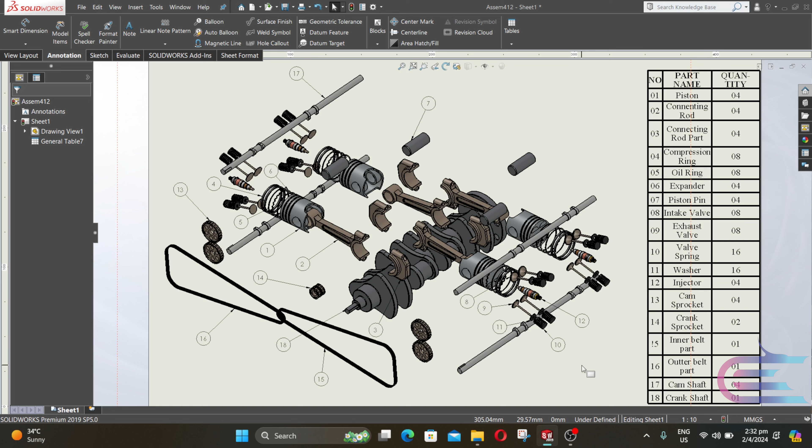In this tutorial, we are going to assemble the power transmission components of the boxer 4 engine. First, we'll assemble the sprocket chain mechanism, then use an alternative method: belt and pulley. Remember, if your PC is not powerful, it may slow down during chain sprocket assembly and cause problems during motion study. To avoid this, I recommend using the belt pulley method shown after the chain sprocket assembly.

Click on Insert Component, then go to Sprocket Chain, press Ctrl and select Cam Sprocket and Crank Sprocket. Now place it here.

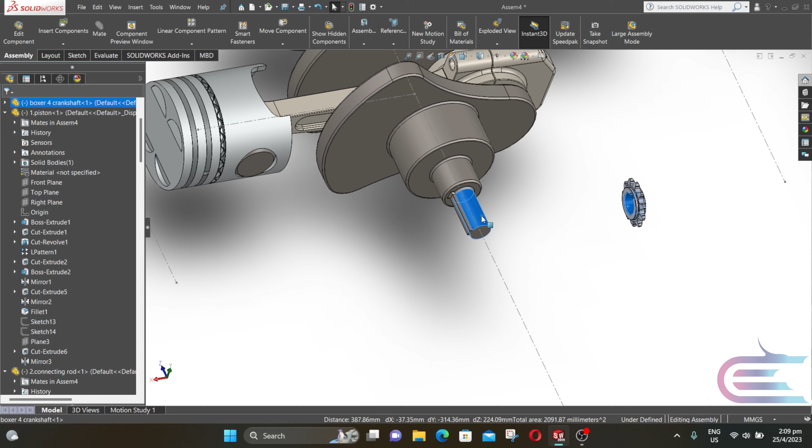Now press Ctrl and select these two surfaces, then click on Mate, select Concentric and click OK. Now select these two key slot surfaces, select Coincident and click OK.

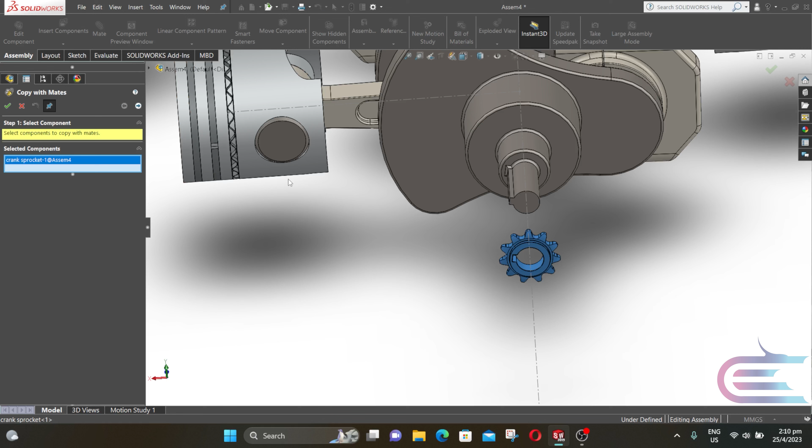Now close the mate, expand Insert Component and select Copy with Mate, then select the crank sprocket, then click on Next. Now follow the violet color and select these surfaces, then click OK.

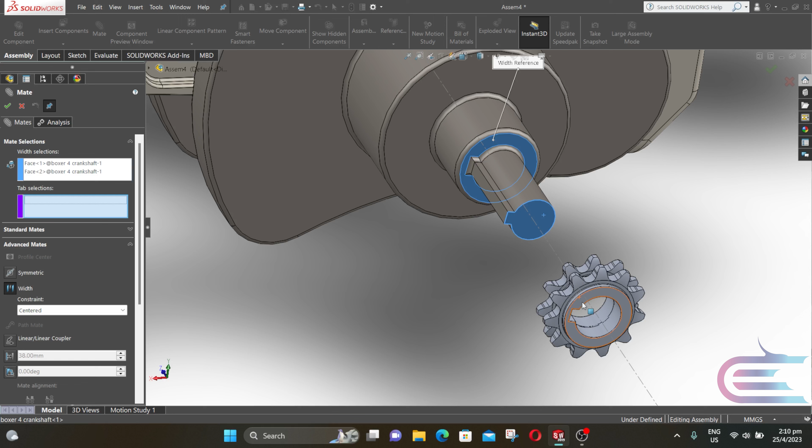Now click on Mate, expand Advanced Mate and select Width, and select these two surfaces and select both sides of the sprocket. Then click OK.

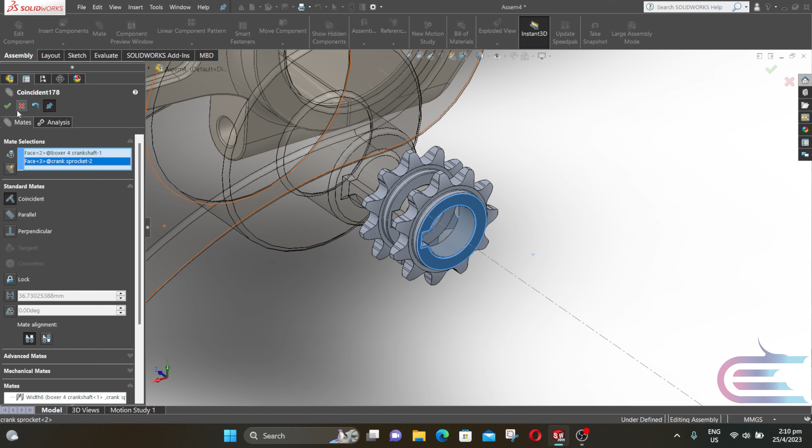Now again select this surface and this surface. Go to Standard Mate and select Coincident, then click OK. Now close the mate.

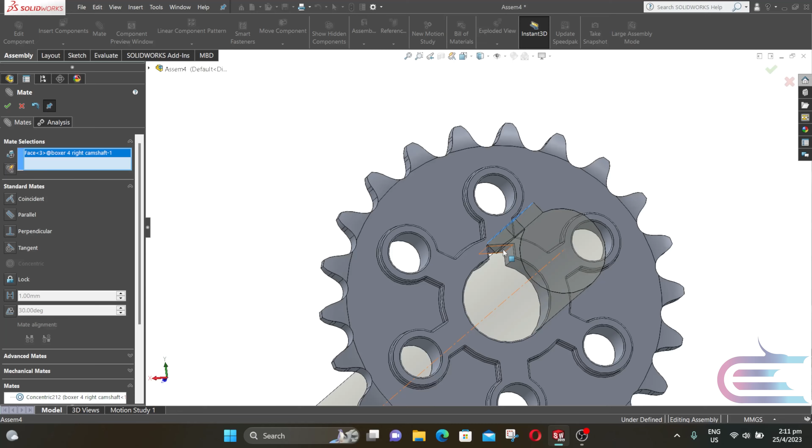Now press Ctrl, select these two surfaces, then click on Mate, select Concentric and click OK. Now select the key slot surfaces, select Coincident and click OK.

Now close the mate, expand Insert Component and select Copy with Mates. Then select the cam sprocket and click on Next. Now follow the violet color and choose the proper surfaces.

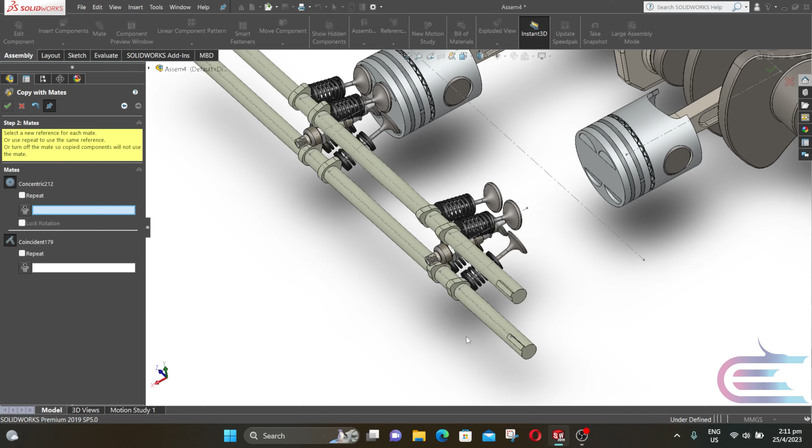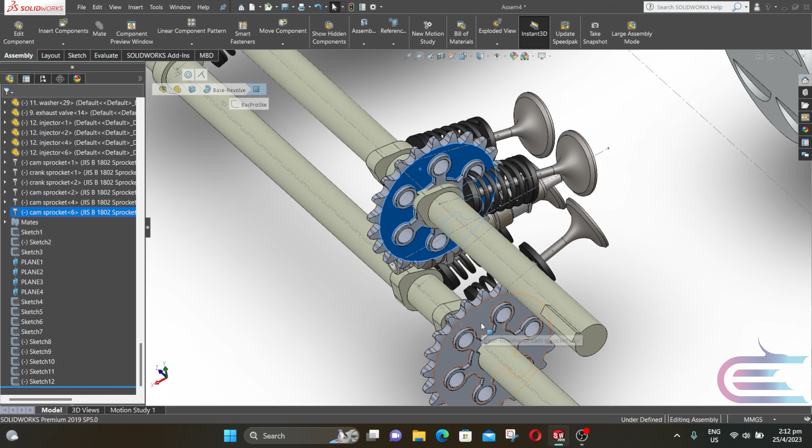Close mate. Select this surface, press Ctrl and select this surface. Then click on Mate, select Coincident and click OK.

Similarly, repeat the same process for these two cam sprockets.

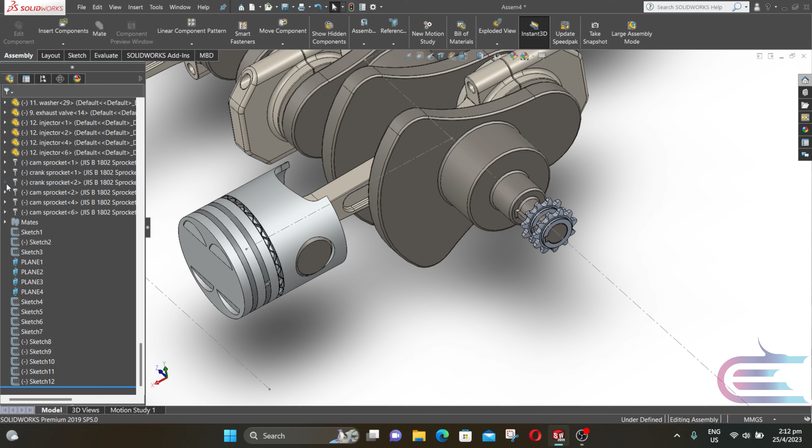Now select the outer crank sprocket and expand it. Select the midplane of the crank sprocket. Press Ctrl. Now expand any of these two cam sprockets and select the midplane of that. Then click on Mate, select Coincident, then click OK.

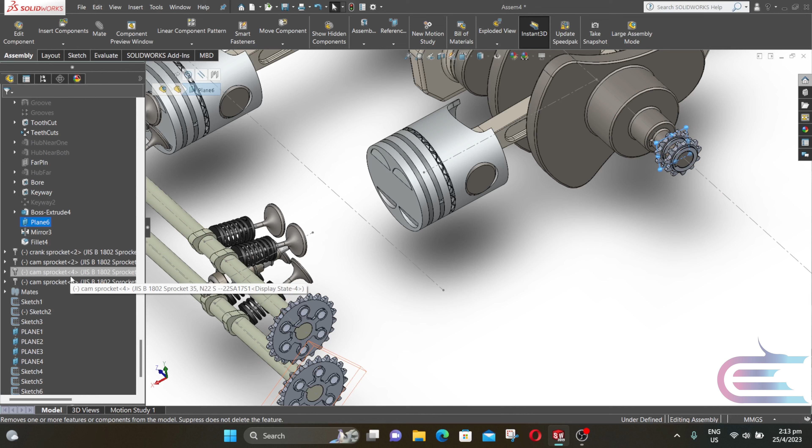Now repeat the same process for the other crank sprocket and the rest of the two cam sprockets. If you put the cursor over any of these sprockets, an orange color outline will help you identify the proper one.

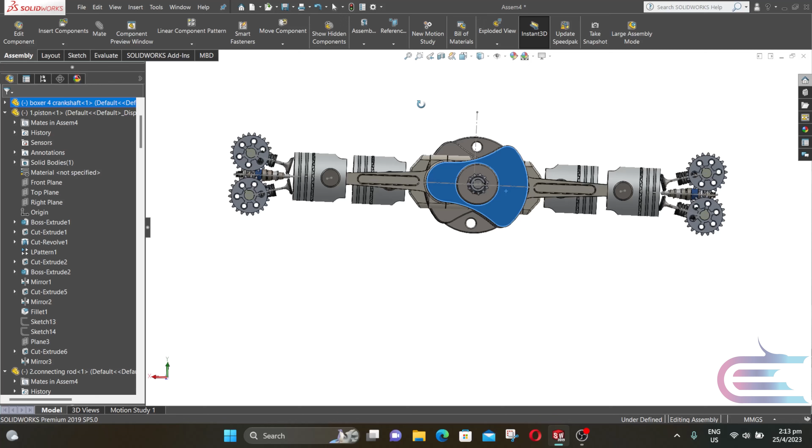Now we have to synchronize the engine components. Place the first piston at top dead center, as it is the beginning of the intake stroke.

Now place the intake valve just before it is completely opened, and place the exhaust valve just before it is closed.

After the 180-degree intake stroke occurs at piston number 4, we are going to place the intake and exhaust valve 90 degrees backward to the intake position.

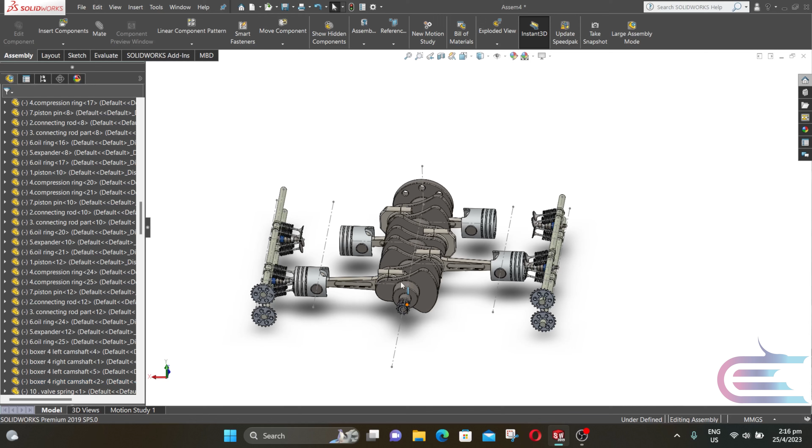Expand assembly and select belt chain. Now select the circles of the sprocket. Click on belt location plane, then expand assembly and select the midplane of the sprocket.

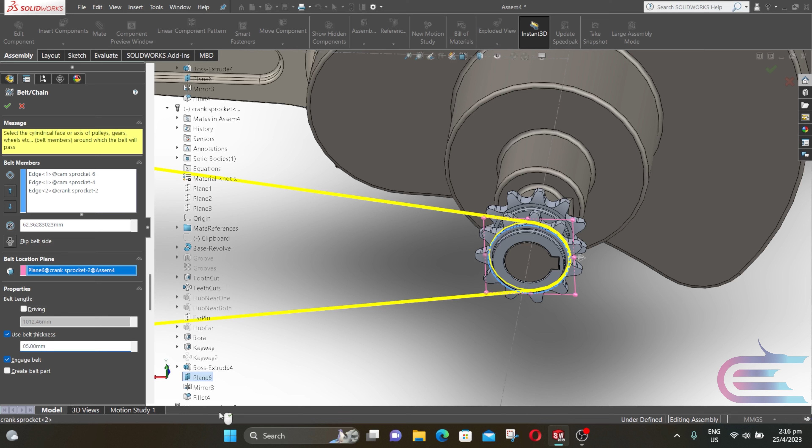Click on use belt thickness and the thickness is 5 mm. Now repeat the same process for making another chain path.

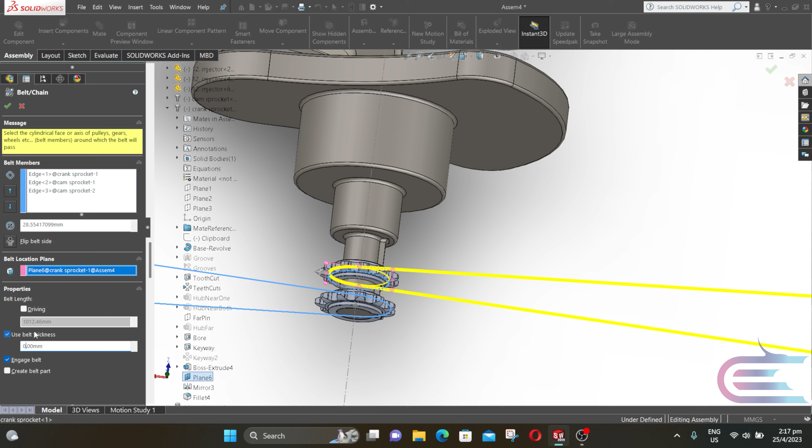Now click on insert component, select chain inner part and chain outer part, then click on open. Now expand linear component pattern and select chain component pattern.

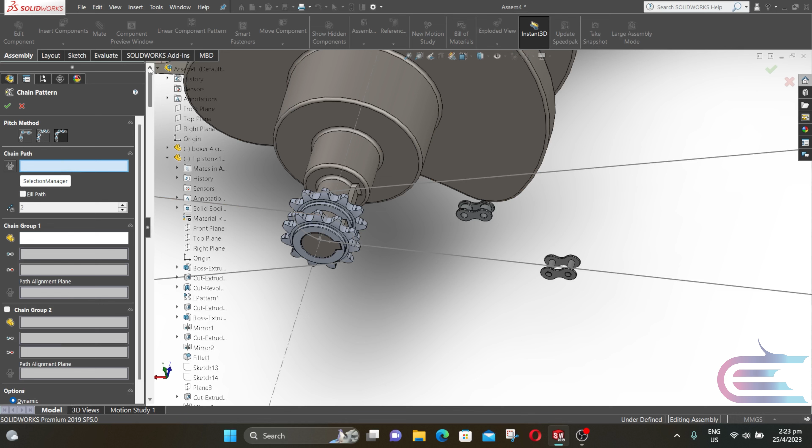Now select the third pitch method, expand assembly, go to bottom, expand belt and select the belt sketch. Click on fill path, select the inner chain part as chain group 1, then select these two holes.

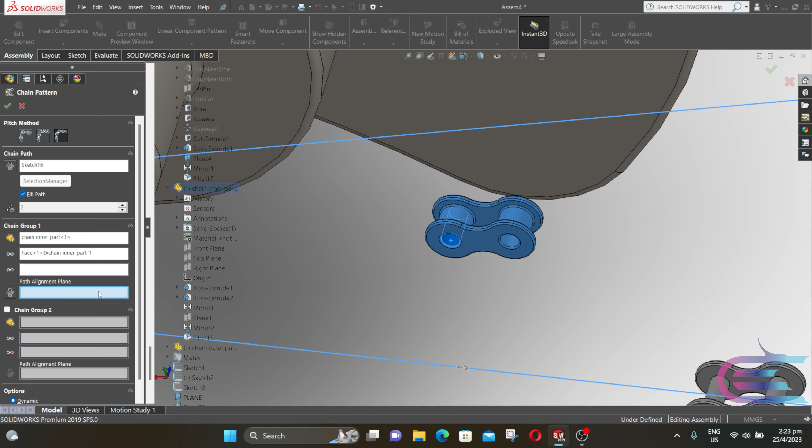Then it asks for the chain alignment path; select the midplane of the inner chain component, then click on chain group 2 and select the outer chain part.

Select these two circular surfaces, and then it asks for the chain alignment path, so select the midplane of that part. You can see a gap here, so increase by one more component.

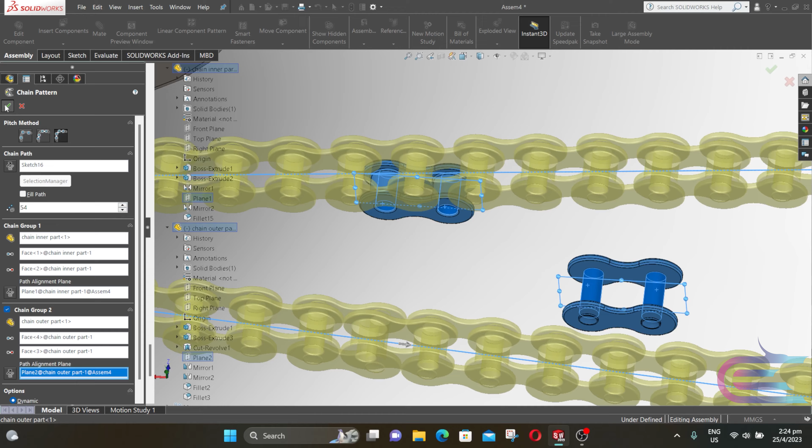Now repeat the same process for this side also.

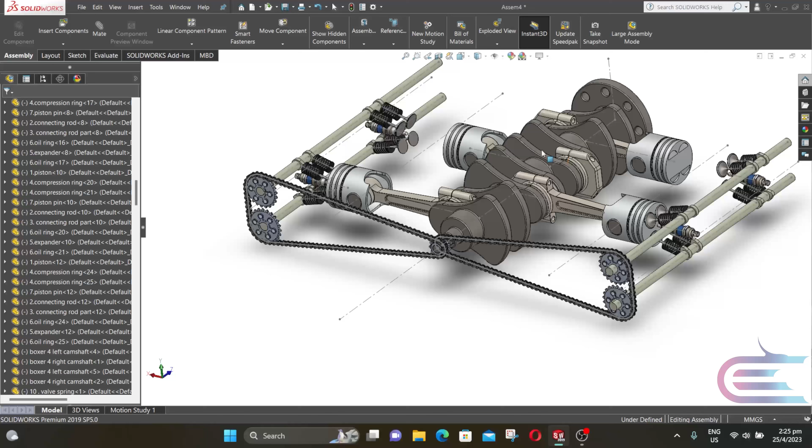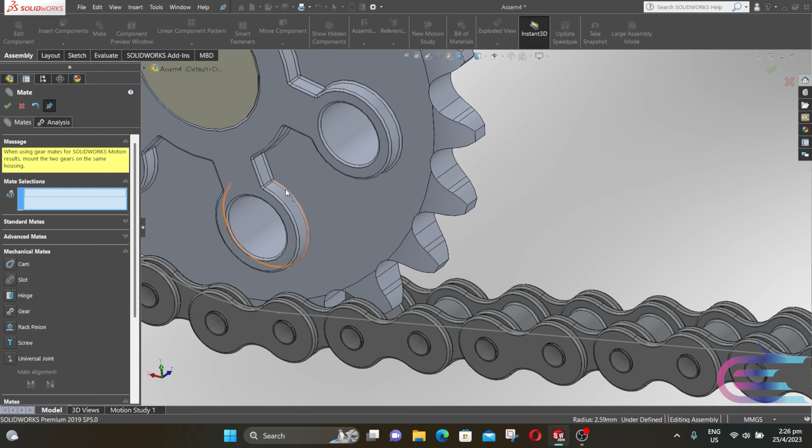Now click on mate, expand mechanical mate, select gear, and select this surface and this surface. Then click OK. Now repeat the same process for the other side also.

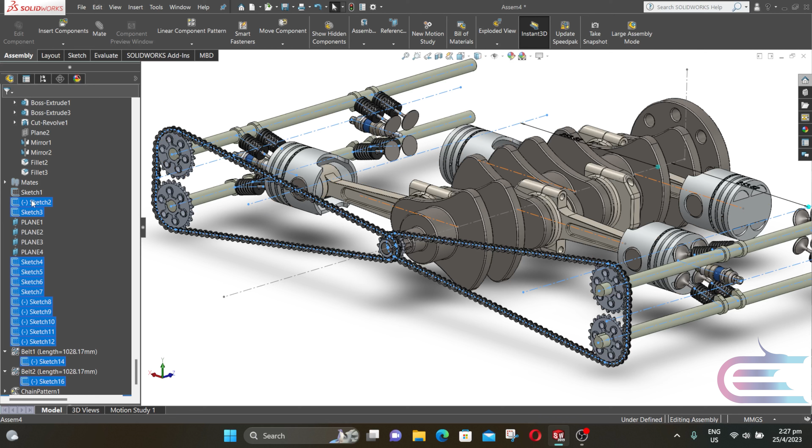Now we are going to assemble with belt and pulley. Click on insert component and select the cam pulley and crank pulley, then click on open. Press Ctrl and select this surface and this surface.

Then click on mate, select concentric, and click OK. Now select these two surfaces, select coincident, and click OK. Select the key slot surfaces, select coincident, and click OK.

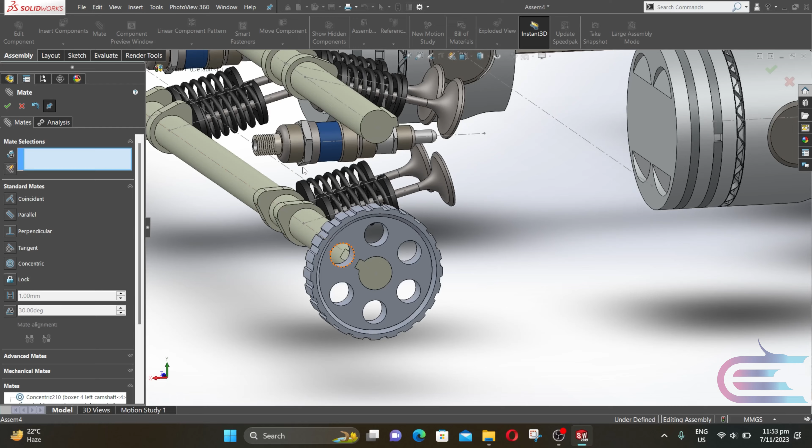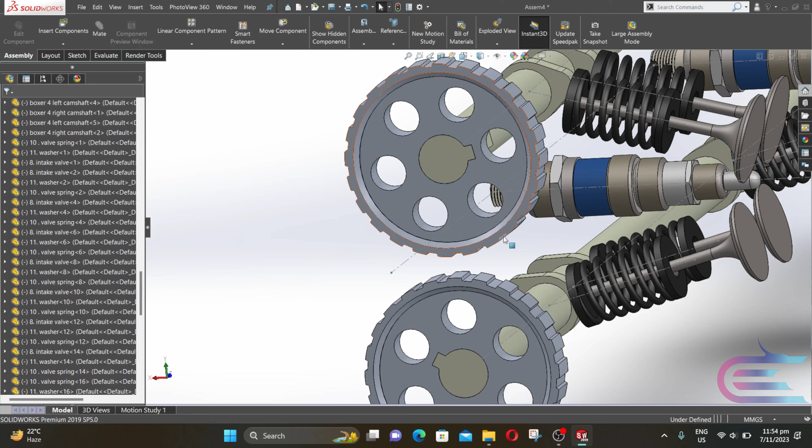Now expand insert component and select copy with mate. Now select the cam pulley, then click on next. Follow the highlighted color to the adjacent camshaft for selecting the proper surfaces. Now assemble the crank pulley using a similar method.

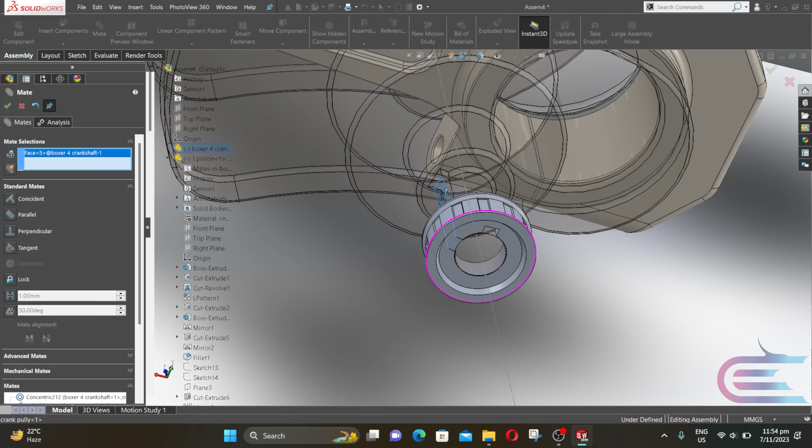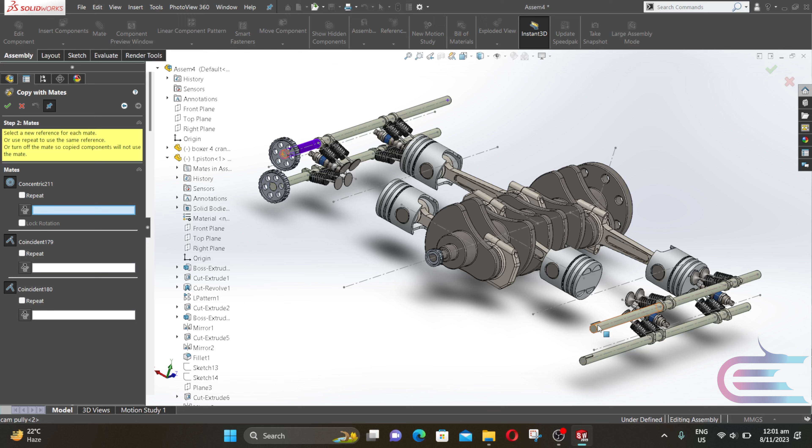Now close the mate. We are going to select copy with mate option for assembling the right side pulleys. We are going to skip this mid part because we don't want to mate with these forward surfaces.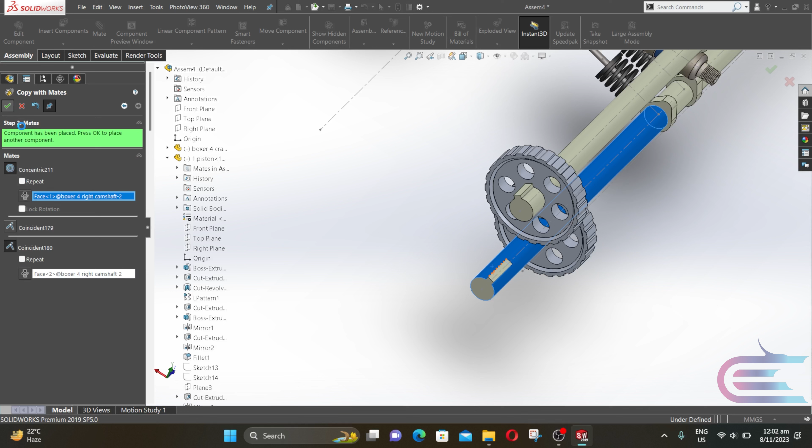Now click on mate again. Select this surface and this surface. Select coincident and click OK.

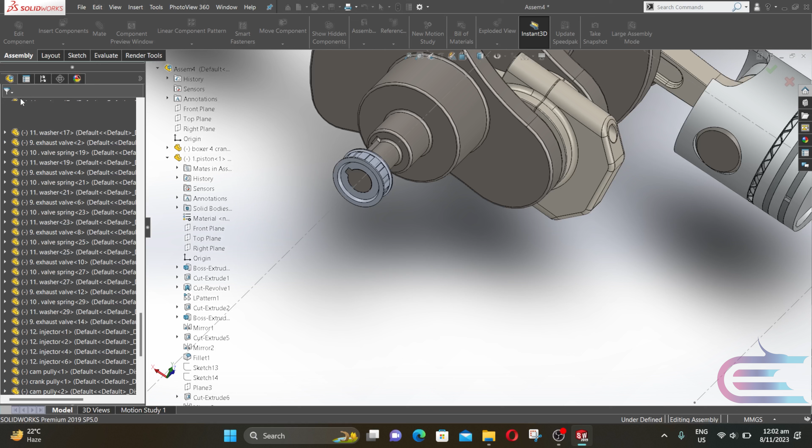Now expand insert component and select copy with mate. Select the crank pulley, then click on next. Select this surface, skip the middle one, and then select this key slot surface. Then click OK.

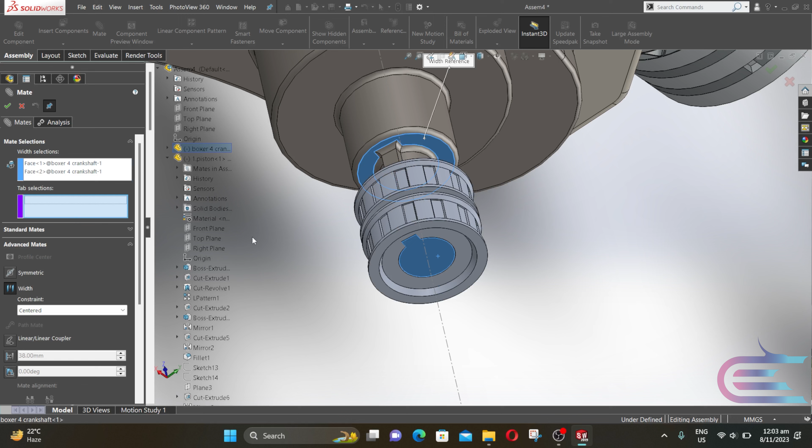Now click on Mate, expand Advanced Mate, select Width. Select these two surfaces of the crankshaft, and now select both sides of the pulley. Then click OK.

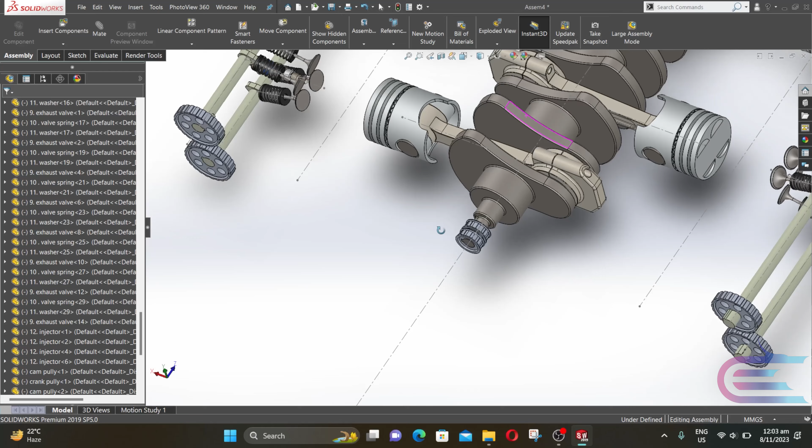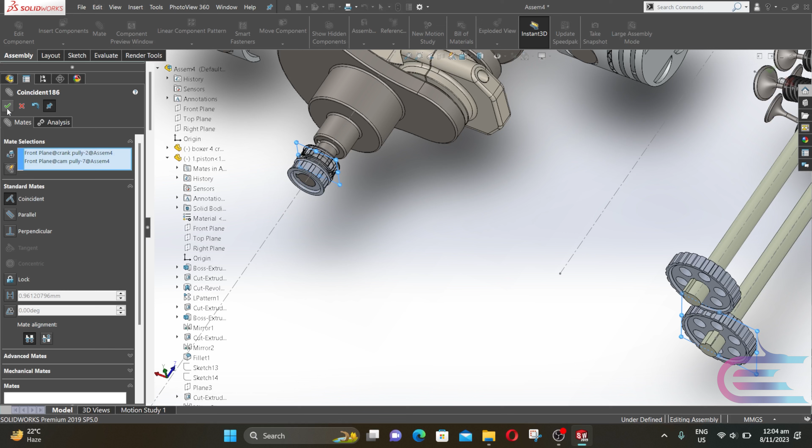Now expand the second crank pulley, then click on front plane, press Ctrl. Now expand any of these two cam pulleys, select front plane, then click on Mate. Select coincident and click OK. Now close the Mate.

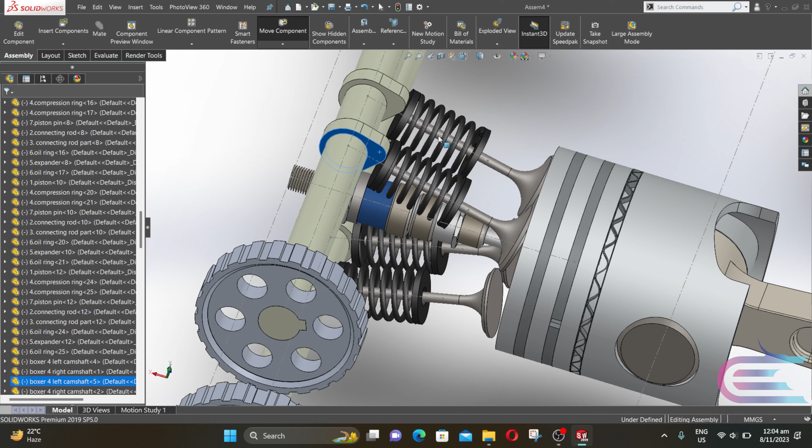Now we need to synchronize all of the engine components. So rotate the crankshaft and put the front piston to the top dead center. We are going to synchronize all of the components as it is the beginning of intake stroke. The crankshaft rotation is in clockwise direction, so put the intake valve as it is almost fully open, and place the exhaust valve as it is almost closed.

After 180-degree crank rotation, piston number 4 will be in intake stroke. So after 90 degrees, the intake valve and exhaust valve for this piston will be in intake stroke.

Now expand assembly and select belt chain. Collapse the assembly so it will be clear. Now select the outer surface of the pulleys. Click on create belt part and select OK. Now repeat the same process for this side also.

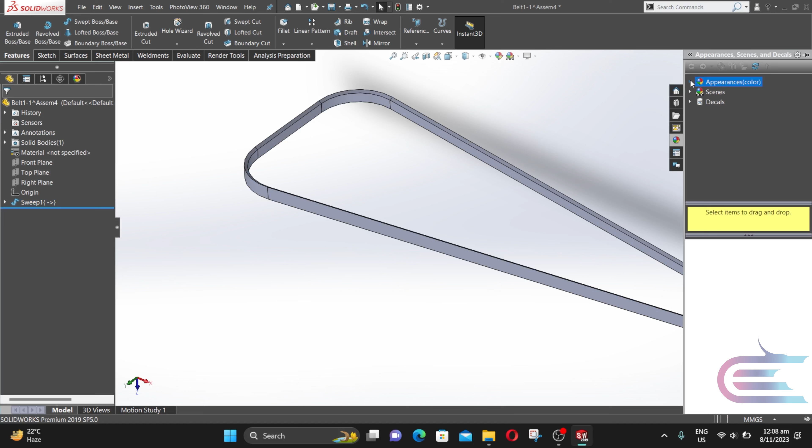Click on Mirror Entities. Select the sketch and mirror about the center line. Go to Features and select Swept Boss/Base. Select the cross section and select the belt path. Click on Appearance and select Matte Rubber.

Now go to the assembly. Repeat the same process for creating the other belt.

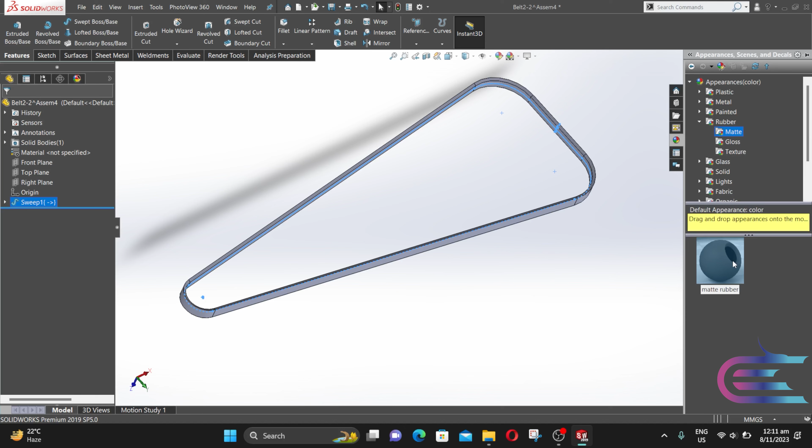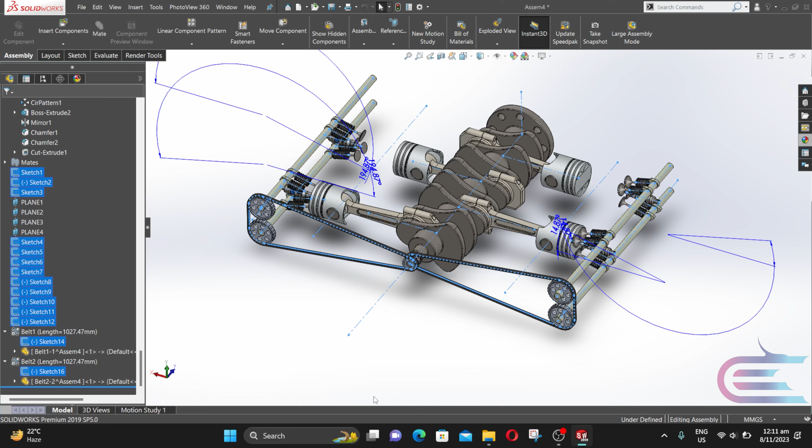Now press Ctrl and select all of these sketches. Right click over the sketch and select hide. Now rotate the crankshaft and check the assembly.